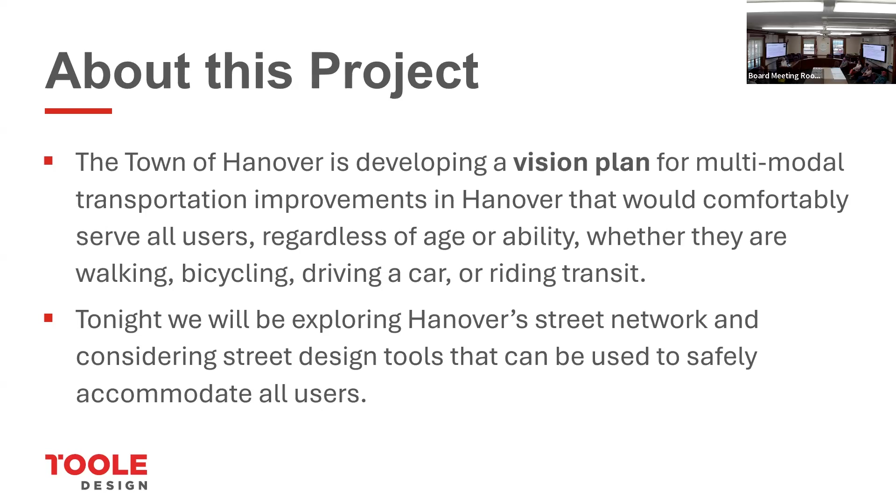And so we're exploring the street network. We're just getting started, getting into what data and background analysis we can get going. But really, it's the collective experience of everybody here that helps us a lot going forward. What we're going to do tonight is go over some of the key considerations that we're thinking about. Look at some precedent areas and how they've changed, both internationally and maybe nationally. I don't know if we have a US example, but we also have a toolbox, we have maps. And so we want to talk with everybody about your thoughts about the area.

Carolyn, can you walk through what you've done today? So we are on an intensive, we call it a charrette in our business, where we're 3 days working very closely together. We're in the Murray room of the library and you're certainly welcome to drop in and see us. Dick is with us for 3 days from Holland. So we're doing a real intensive, and we're going to get the ideas out and then refine as we go along, and then have a presentation back to the town in the fall on where we are for input. So we're in the Murray room.

This morning we met with town staff and college planning staff so that we understand some of the thinking right now, and what you're hearing, and additional plans. A lot going on, lots of construction, and with that go transportation improvements. Then there was some field reconnaissance in the afternoon. And then we just met with the bike walk committee and got a lot of input from people, some of whom are still here, who have been thinking about these areas for a long time and have a lot of history. So we have a whole long list. East Wheelock Street definitely needs to be redone.

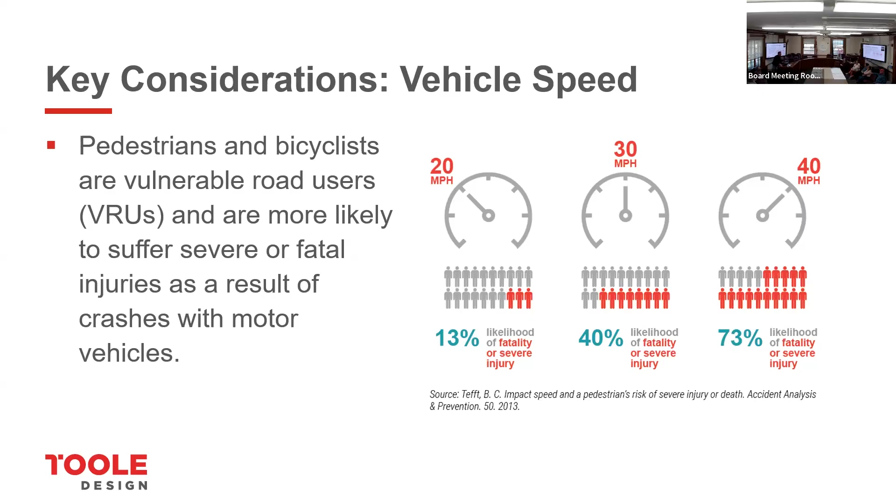I know that Hanover has this 25 mile per hour limit townwide. At the same time, we also know that lowering it even further, you're running into trouble. But design speeds and legal speeds are two different things. So we might even think about designing it for lower speeds at certain areas where we feel that need to be.

And the second key consideration is that there's not just one type of bicycle user. There are a zillion types of pedestrians, we know that. But for bikes, we got stuck in this one thing where a bike lane is for people who dress up with helmets and sporting gear, and they go as fast as they can, and they're shouting to everyone who's in their way.

But that's only about 4 to 7% of people who actually want to ride a bike. And if you design for that, you got your lovely bike lanes on Lebanon and on Wheelock, which are terrible, and I would never ride with my children, mainly because I'm not part of those 4 to 7%.

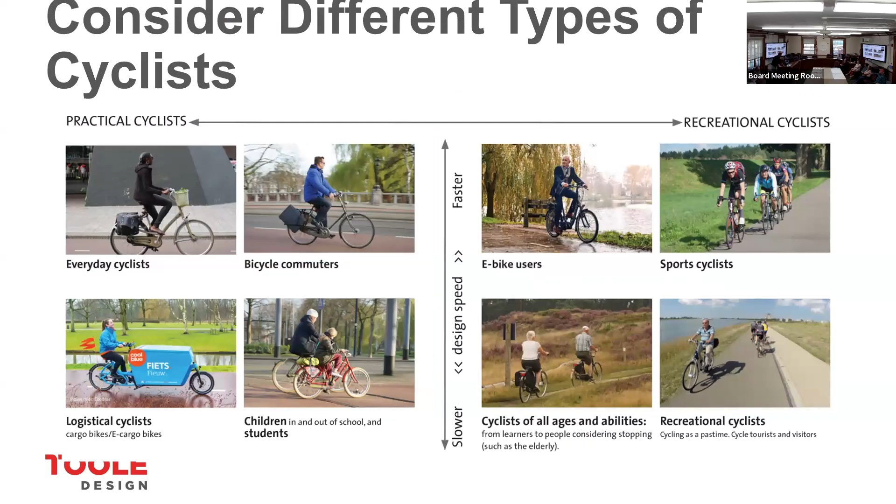I'm part of the 51 to 56% who wants to enjoy safer ways of traveling, right? We're not all sporty cyclists. We're not all that male daring one. People have different needs, so identify and design for that, because that's really the inclusive way of doing it. And that means we need different types of infrastructure, more than just a bike lane.

We need maybe an advisory bike lane on certain lanes, but certainly when we go to streets which have higher speeds, higher than 25 at least, or busier streets, more than about 4,000 to 5,000 cars per day, you might need to think about separation, which is more than just paint. And if you don't, you just keep ending up with all of those little accidents here and there, and you're never going to be proactively getting a safe system.

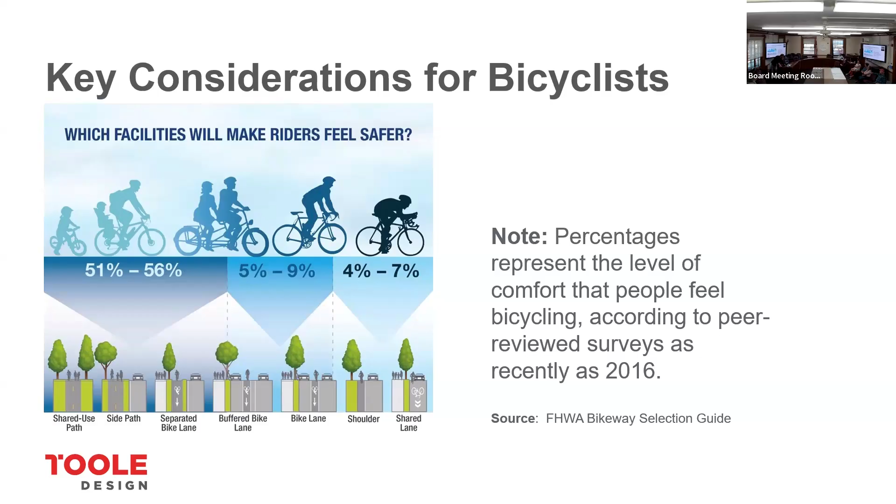Figuring out where we need that infrastructure: we've got our guidelines, I've got my Dutch guidelines, and FHWA, your national system, came up with these schemes which more or less overlap that, so that's pretty nice. I think they're still a little bit too daring, because if you look at this scheme, you see that at 30 miles per hour with 6,000 cars, you can still get away with a bike lane. I wouldn't do that, so that light blue area, I would shrink it.

A bike lane is a lane on the road right next to traffic. Yeah, a painted bike lane. And then a shared lane is just mixed use, you get all sorts of forms, I'm going to explain it later. And a separated one is with a curb or a boulevard or something which brings you further away from fast driving cars, basically.

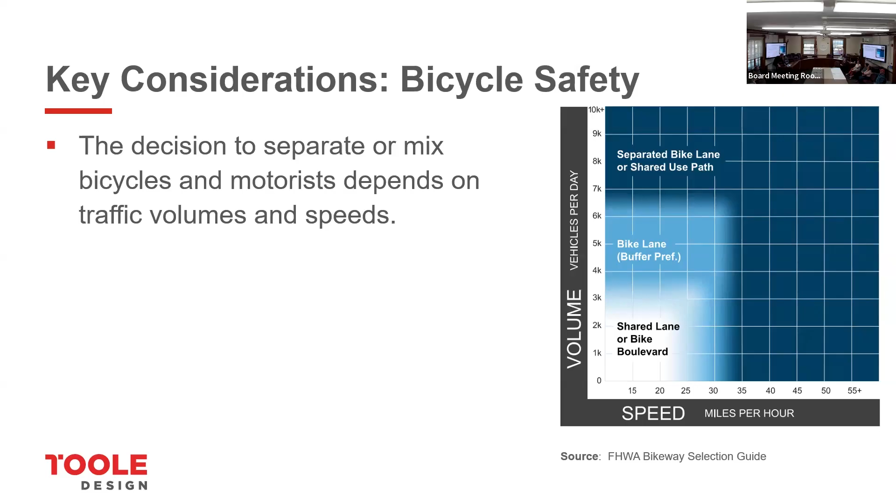Using guidance on volumes and speed provides us input on where we need to provide that separation and where we can do the mixing. And they are two sides of the same coin. You really need that. There are two different worlds. The world of traffic, moving from A to B as fast as you can for drivers and being annoyed when you're in traffic, and the world of people where there's crisscross movements and you interact with each other, you're social, you're riding two abreast or walking two abreast on the sidewalk, people drive courteously.

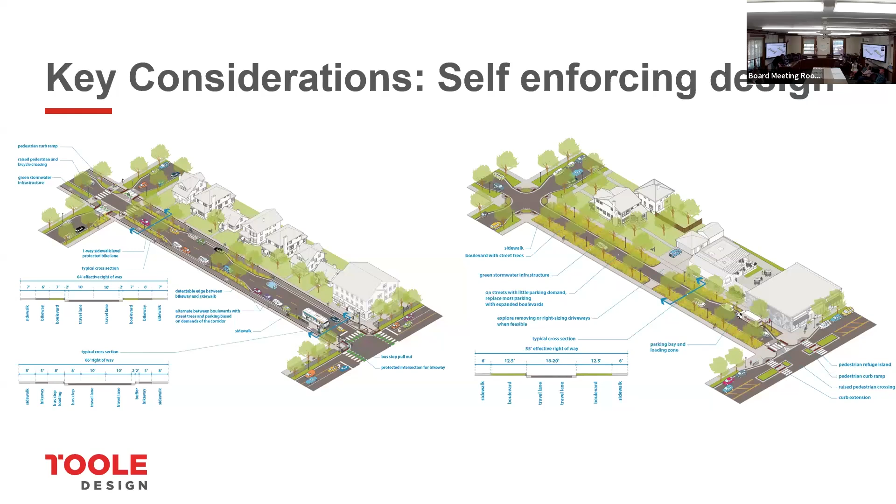So it might make sense to at least put those as high priority routes we need to tackle one way or another, infrastructure-wise. And at the same time, there's also a whole network of other streets which is already there, where we live, where we do our stuff, where we work maybe, and we call those the local streets or the quiet streets.

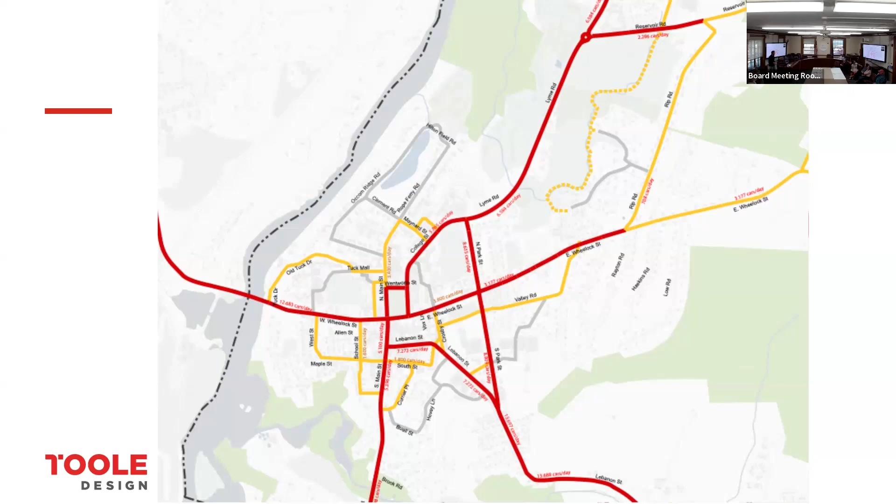They're just there, and we don't need to do a lot with those. We might need to tweak them here and there. We might need to take some additional crossings or some safety points, but you don't have to completely retrofit from A to B. And that's the gold we have in our hands. And I think we need to exploit that in some way to see if we can capitalize on that.

So say, how are we going to provide safe walking and cycling options along the corridors where we need to? We're going to separate where we need to, and then we can make use of mixing and mingling where we can. And that second network, that quiet street network, if you can make that more continuous, then it's already there. We don't have to wait 10, 15 years for the whole capital project thing with shared use paths and protected cycle tracks and wide sidewalks to finally be built. It might be even longer.

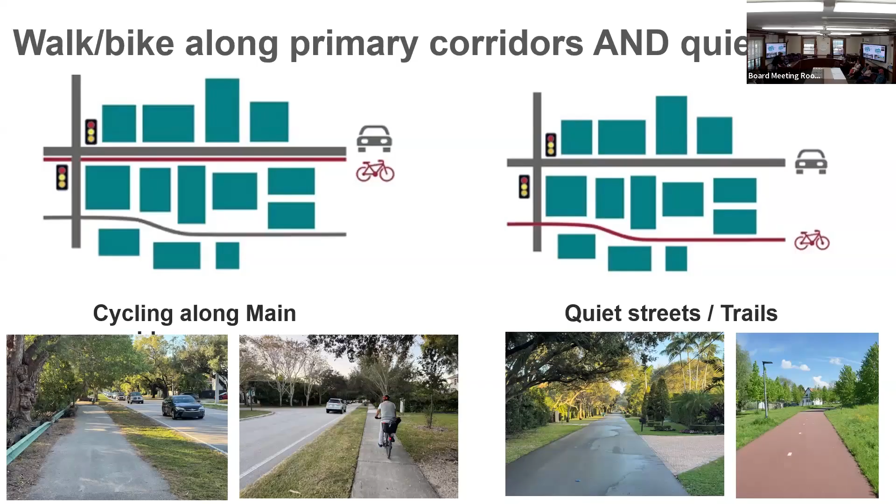So those two sides of the coin again, we're trying to find that within the downtown and also further out. And with that in mind, I don't want to be talking too long. I got 4 examples from the whole world just to inspire you a little bit how other cities, other places are achieving or trying to achieve that. Bigger corridors to lower corridors, starting with where I'm from, Rotterdam, in Holland.

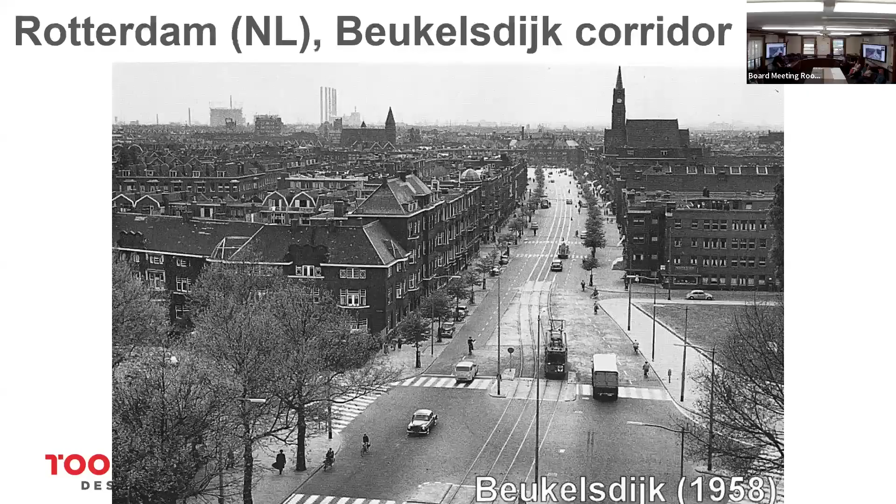And take you through time, old situation. Well, we had the same situation as you guys. No infrastructure and people driving and cycling, doing everything in the lanes, even the streetcar. This was the same street about 15 years ago. So we got our protected intersection. We got our separated bicycle infrastructure. We make it red, you make it green. The color doesn't really matter.

There's a wide sidewalk next to it. Cars have traffic lights. There's a crosswalk. There's a cross ride. Every engineer's wet dream is here. It's completely as it should be. But people still die because traffic lights are not the safest way of designing stuff. They're convenient because you can enhance your traffic flow, but you accept a little bit lower traffic safety and red light running and severe incidents.

So it was taken out again, and this is the same situation nowadays with a roundabout, and it's a crosswalk, cross ride. It has right of way for walking and cycling. There's even a bus stop near the roundabout, a floating bus stop. Cars go through it faster than when it was still a traffic light, because they don't have to wait for red light. You can go gradually and slowly, which makes you get through the corridor faster.

So all these little design tweaks, there's the refuge island, center island, bigger island, to get across every side arm of the roundabout. And all of these little tweaks together make this a safer corridor to travel through and faster for cars and faster for bikes and pedestrians. So a gradual walk through time. Another one is the same thing from the top.

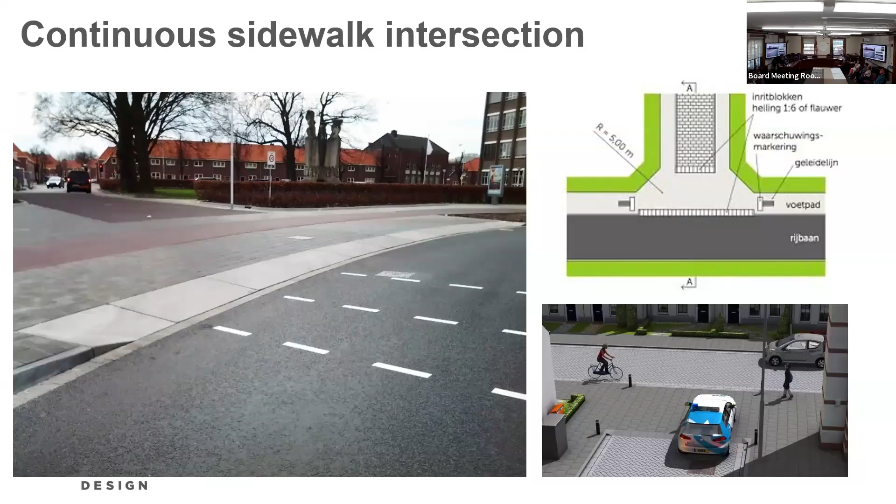And if you're going into Allen by driving or cycling, you have to yield for all of the pedestrians walking the sidewalk. Yeah, so it works, and it is super intuitive. You probably wouldn't even notice it, but it works like a charm. Currently, that design has been figured out how to fit into the American guidelines, so that's nice. This is still Canadian, and Nanaimo's figured that out for Canada.

But it really works in the way that it's so intuitive that if you're getting onto the main street or off the main street, you do that at a slow pace, and you're really alerted to all of the traffic modes, walking, cycling, and car traffic who you have to give way to. So all of those clues together work better than just putting a red light and a green light up, or better than a mandatory stop and then sort it out.

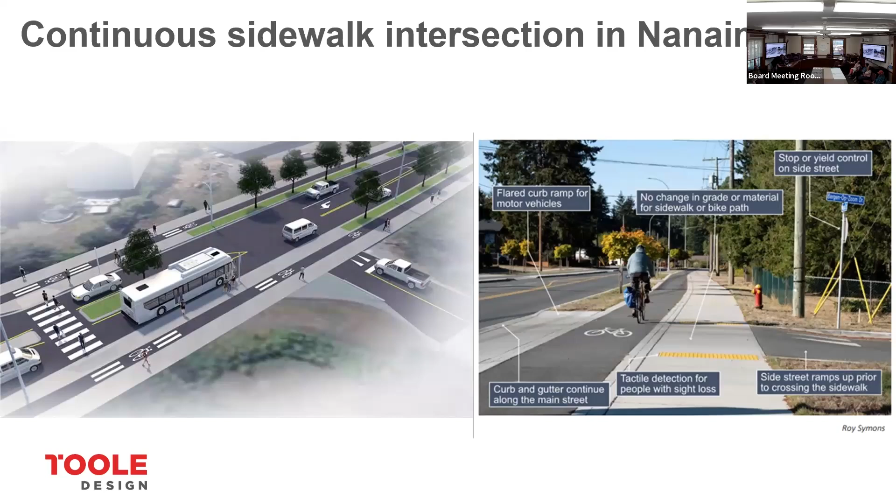And that's what I mean with proactive design. And you can put that street hierarchy of this is a main street and that's a side street. You can make it way more apparent than everything in the same black asphalt. Another one of those examples somewhere else in Canada, Snow Country, Snow Town, pretty similar to this one, where this is one of those side street entrances nowadays.

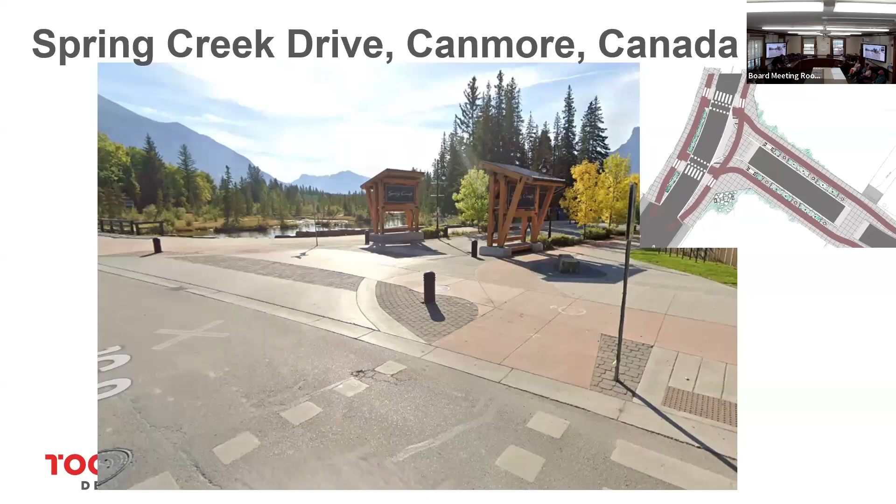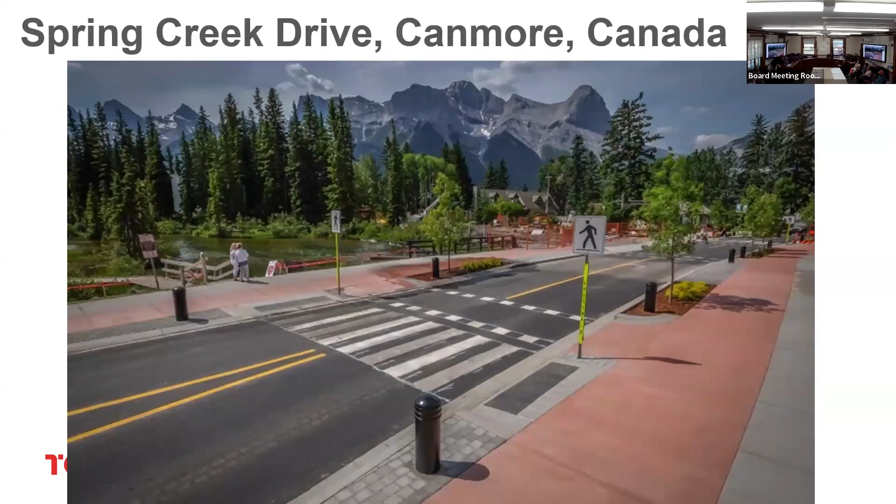Old situation, new situation. And you also see a crosswalk and a cross ride next to each other. And they use red again. They're a little bit petrol, might be green. But designs like this can really help and finish your street network. Same situation altogether. So there's, I think, 8 months of snow on this one, but it still works. Even the context sensitive materials with pavers or stamped concrete. Situation.

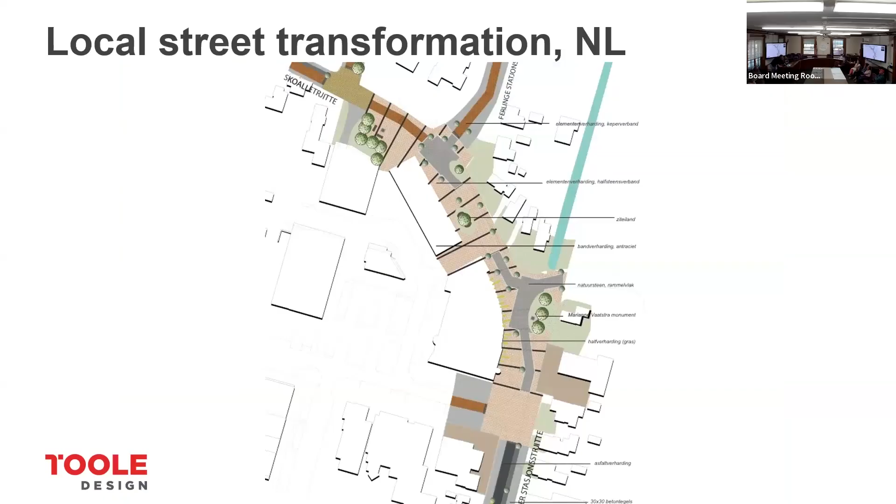And finally, one example from where I live, a small town of, I think, 10,000 people. This is their main, well, the main street basically runs around their shopping area. And people were doing that with about 30, 35 miles per hour through this corner. And I just took it all out, and in terms of placemaking, figured it was more of a place than a road. Put a spaghetti of little brick pavers in, and they designed. People still drive the same amount of cars right there, but people behave differently if you change the context material.

If you take away the curbs and take away the asphalt and take away the signs and the lines, they suddenly start to behave like people again. That's pretty funny. So they slowed down. They started to look left and right where there's other opposing people passing over, etc. And yeah, it kind of works.

And I'm not saying you should do this everywhere, but at some locations you might think about humanizing streets more instead of doing it 100% the engineering way, because it will create your public space. It will enhance your public space. It will increase your traffic safety at some locations. There's a little bit of inspiration of how we use different tools on higher order streets and lower order streets. There's way more tools, and then giving that part to you, or how to tweak your streets over here.

Everybody see me? I'm gonna try and get out of the way.

So all of those street designs that Dick went through are sort of a combination of ingredients that are in a recipe that is different for every location. And we have those ingredients available to us to kind of cook up our own recipe for how we want to make our streets safer for all people. A lot of the presentation focused on bicycles because that's sort of most challenging, but the pedestrian is the basic building block.

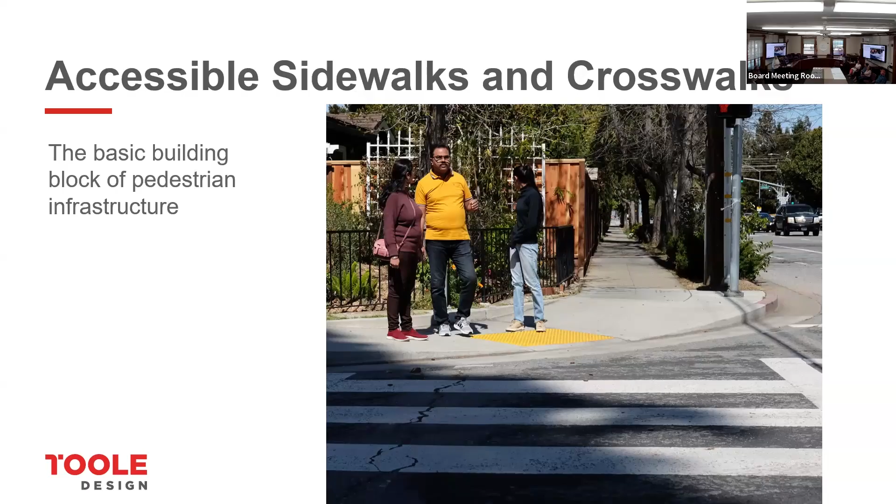Where we can, we want a landscape buffer. People want to be separated from the traffic next to them, particularly on those primary roads we showed in red, which tend to have higher speeds and higher traffic volumes, and we don't always have the right of way. Hanover is blessed with a lot of nice tree buffers with big trees, and it makes walking much more pleasant. The trees also help calm traffic because they make the space feel narrower.

Then we look at shared use paths—this is the Lyme Road shared use path. It's very comfortable for all types of users; these happen to be roller skiers. It's a place where I see kids learning how to ride their bike, a place that works on a really busy road. It just needs to be longer and needs to get through the intersection better—we heard a lot about that from the Walk Bike Committee.

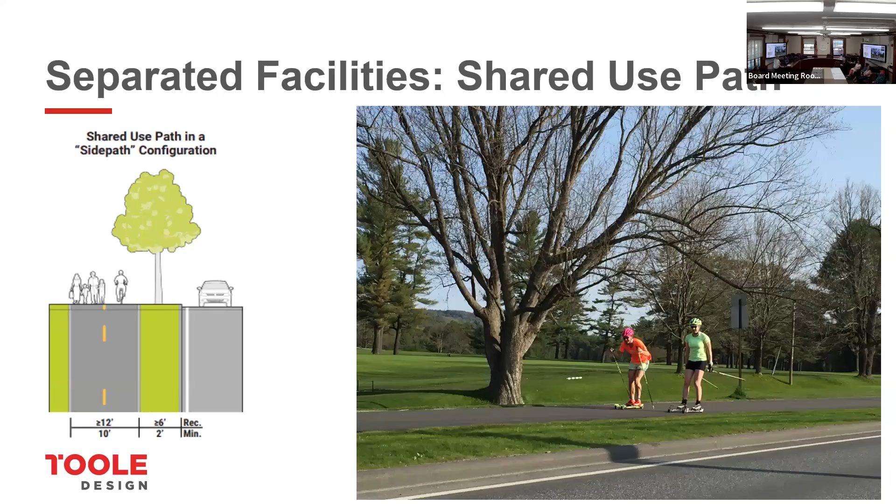When you look around town at areas with bike lanes, like on Lebanon Street, the traffic volumes are just too high for a simple stripe lane, so you'll see people using the sidewalk instead. They're telling you what they want to do, and it's logical—what makes sense for all ages and abilities.

There are also buffered bike lanes—another option in some locations, if there's space, though it takes right of way. Honestly, a lot of times when comparing the right-of-way cost of buffered bike lanes versus an off-street side path, it's less right of way to do a side path, but sometimes bicyclists work better in the street. So it's another tool in the toolbox that might be applicable for a particular type of street.

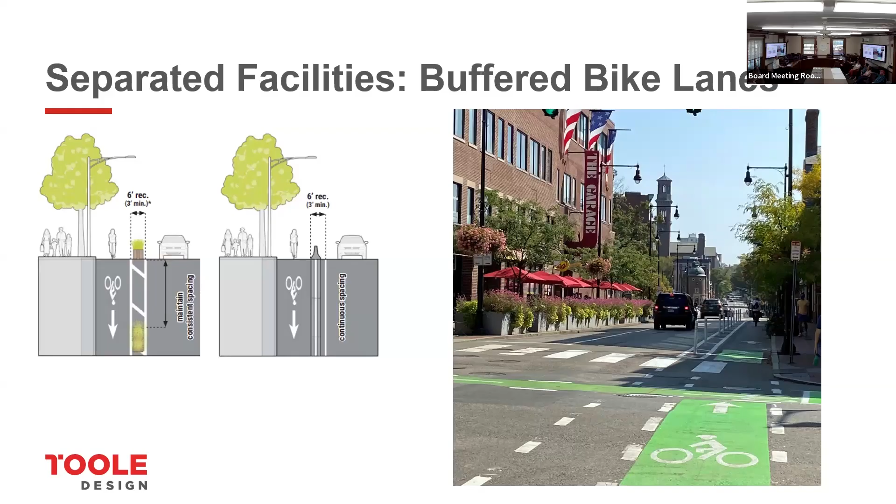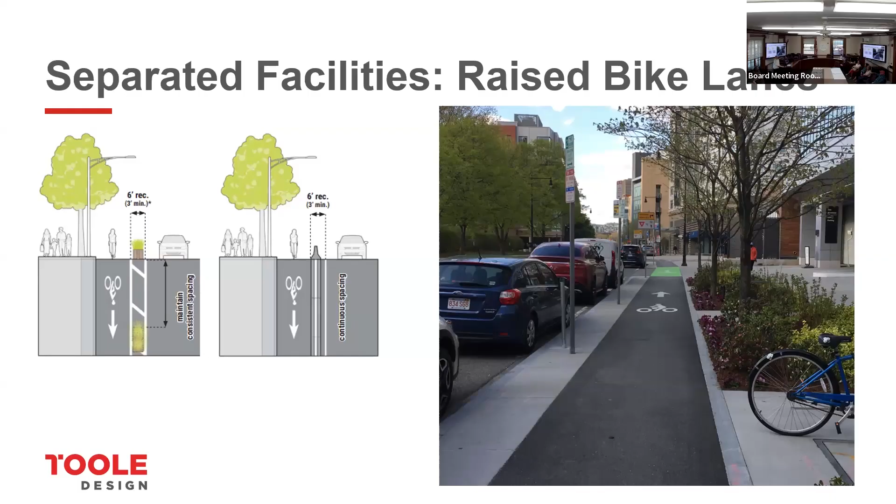Sometimes there's a raised bike lane at the sidewalk level, which also feels very safe and is separated from pedestrians. In this location, there's a little green strip between the pedestrians and the bikes, which helps it feel safer and better if you have the right of way—it's a good way to go, though we often don't have that right of way. The vegetation in these areas can also absorb stormwater and provide additional green benefit, so we definitely want to look for those opportunities when we can.

Then there's intersections—as Dick said, this is where we're failing, because this is where crashes happen, this is where it's dangerous. We have to bring safe biking and walking facilities to the cross streets better and make it safe for everyone.

Then we look at shared streets. So we sort of looked at the tools for those red roads that we saw on the map that have higher traffic volumes and speeds, but then the slower streets may need some additional tools in order to make the traffic truly be slow enough so it's comfortable for both bikes and pedestrians to be on the street.

So what is a shared street? These are low volume streets designed for low speeds to allow pedestrians, cyclists, and vehicles to mix without that traditional separation.

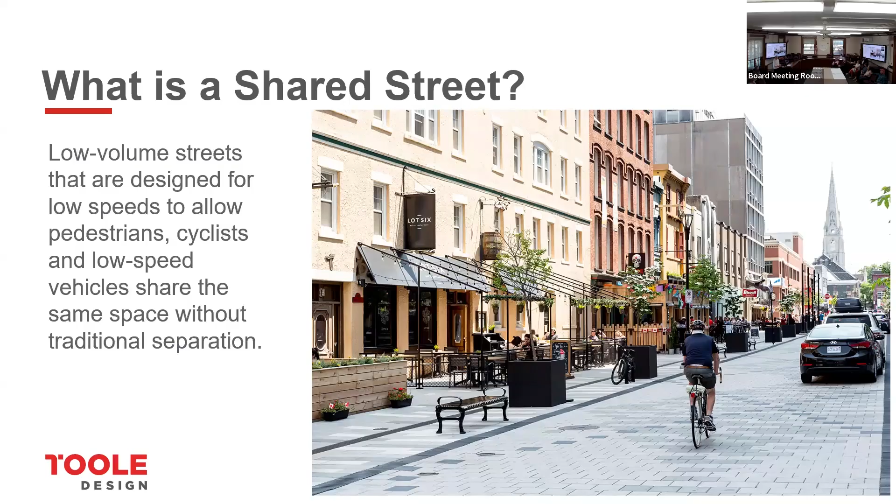Here's a shared commercial street that actually Dick designed. Maybe you want to say a few words about this, but I'll just say it's in Banff where there's a lot of snow. Yeah, it's in the Canadian Rockies, and it's very touristic.

Everyone's outdoorsy here. This one is sold as a woonerf, and a woonerf is something we in Holland designed in the 70s, and I lived in one for 10 years. My kids were born in one. The main idea is that the outdoor space is really part of your living room.

As people would be invited in your own living room, they would behave, they would not run around. You don't want people to rush through your outdoor living room. And it's your collective living room, so you share that with your neighbors and your shop owners forever in this situation. So physically make it impossible to speed.

That's the main idea. Sometimes we say social interaction or enforcement will help people reduce speeds, but you can also use physical elements, and that can be everything from a tree to a light post to a bike corral to a patio, arranged in such a way that it's really hard to speed up.

If you have a wide, smooth lane, people will speed. If it's a runway, they will speed up to the point where they will take off. But if you make it narrow, winding, and going up and down horizontally, but also vertically, then they will slow down. And then suddenly other functions can happen again.

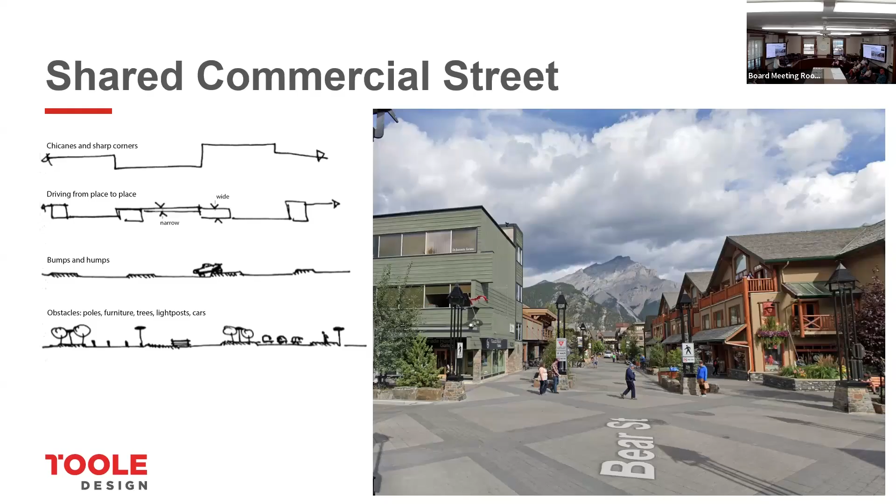Could you spell that for us? We have students in the audience, I would know. A woonerf - W-O-O-N-E-R-F, which is a Dutch word which means living room or living yard.

Thank you. So some other tools that are possible on some of the smaller streets that we saw again, to make mixing more safe and comfortable, are what might be called a bike boulevard. In the photo on the right, you're seeing the sidewalks are separated, but the traffic is calmed through - it could be a mini roundabout, it could be a raised crossing. So that all makes it slower and more comfortable for everybody to be using that space.

And people get used to driving slower, and then you see more people using the street more comfortably.

Another tool to mention is the diverter as well - it's on the far right of the diagram. Sometimes we stop it from being a through street. That's a bit easier if you have a grid, you have more redundancy and opportunity for that. I don't know if you've thought of it anywhere in Hanover, but I know in San Francisco they've done that really well. But all of that kind of makes a calm, slow, low volume street that's safer for everybody.

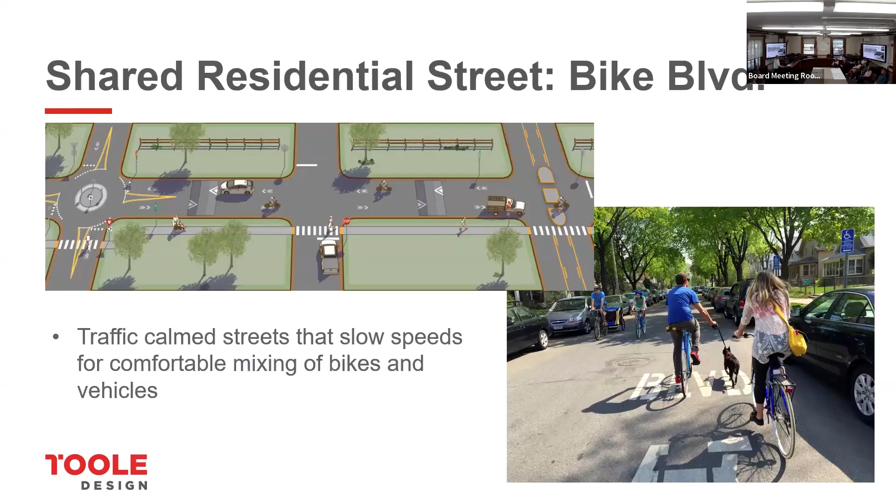Another example is here in Hanover, the advisory lane. On a really low volume street, this is a pretty simple solution that we piloted and was quite a sensation. It shows up in a lot of design manuals. This is on Valley Road, near the ice arena, just south of East Wheelock.

This is a tool from the Netherlands toolbox where you have low volumes of vehicles, fairly low speed streets as well. You're letting the cars share the center lane when they're going by bikes and pedestrians who are on the side, so the dash lines designate where the bikes and pedestrians are. If there's two cars coming, they can go over and pass each other, but otherwise they stay to the center of the road. For a low volume street, you're using that pavement more efficiently than pushing everybody into separate space—using the center because of the traffic volumes, and keeping the sides clear for bikes and pedestrians.

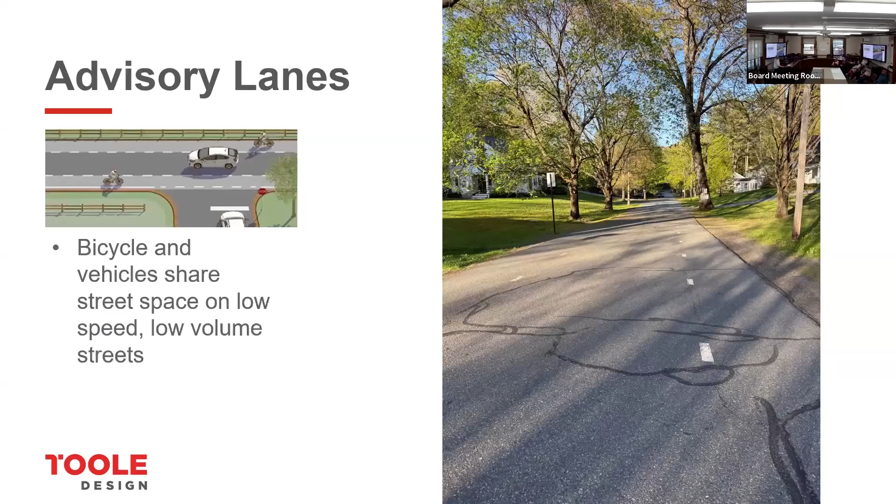We saw an increase of activity by people riding bikes and walking along the road. It was interesting today how many people mentioned it when we were talking. This is a good tool for a small town rural context, certainly, and it has been implemented in more urban areas as well.

So then, how do you make those shared streets slower? There are vertical and horizontal shifts to slow down the traffic and also make it more convenient for pedestrians and cyclists.

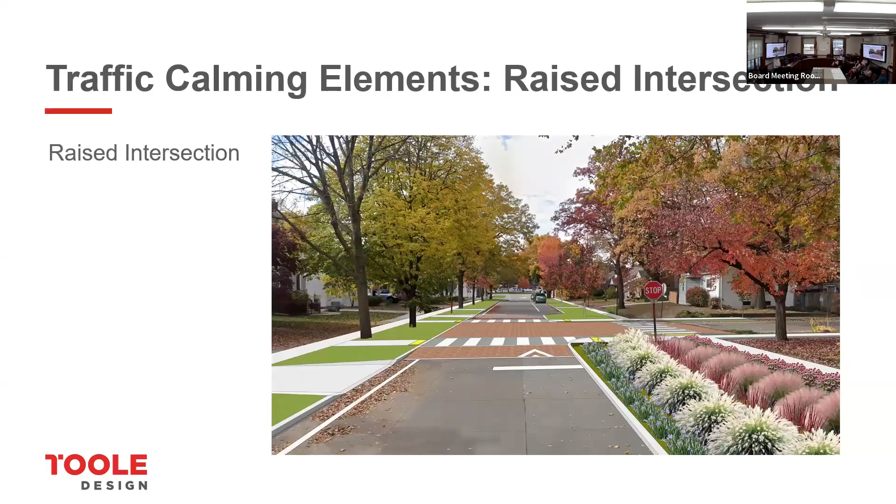This is an intersection that is raised, so the whole intersection is the same height as the sidewalk. You're kind of undulating as you're driving along the street, and that helps to slow people down. There's space for stormwater to be picked up off the street, separation for pedestrians still, but a narrow street with a traffic calming element. This one is both raised and has a change of texture and materials over the intersection itself, which all helps to slow the traffic.

Another example, similar to a raised intersection, is a raised crossing. This is a really good way, especially in a mid-block location like this, to slow the traffic. The way they're designed, they're gentle—enough to slow the cars, but not like the speed bumps in shopping center parking lots that make you bite your tongue when you go over them. What they find with those is that people, as soon as they go over them, really speed up.

There's a lot of what we call speed humps here. They can be raised crossings or standalone raised humps. It's more effective if they're frequent, so you don't get that go-over-and-speed-up effect. We're doing a lot of this in Boston—they've found that spacing of 250 feet in a series keeps people's speeds down. So that's another consideration.

We have this one too, across College Street right at the green, right by Dartmouth Hall—there's a new raised crossing. And on Rip Road, for speed—it's not a crosswalk, but it's a speed table.

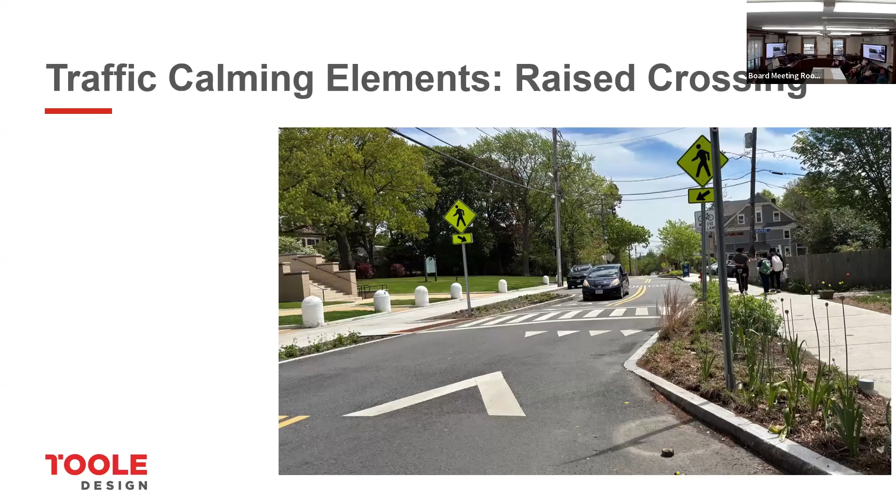In this particular location, here in Hanover, curb extensions also do a lot for calming traffic, and also for giving more space for pedestrians, because they pinch down the size of the roadway.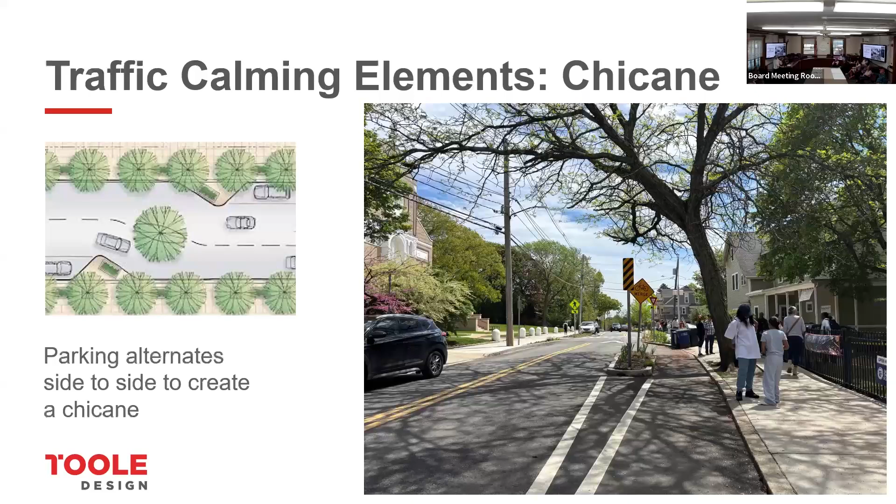And this is a street that's pretty straight, and was a problem from a speeding point of view. And now there's a protected bike lane and slower traffic. And it's a pretty narrow street. This is 30 feet curb to curb, which is pretty narrow.

And then sometimes you have neighborhood traffic calming circles. So this can be at an intersection where a couple of streets come together. This is not a roundabout. This is just much smaller than a roundabout, but it allows the cars to go around and not straight through.

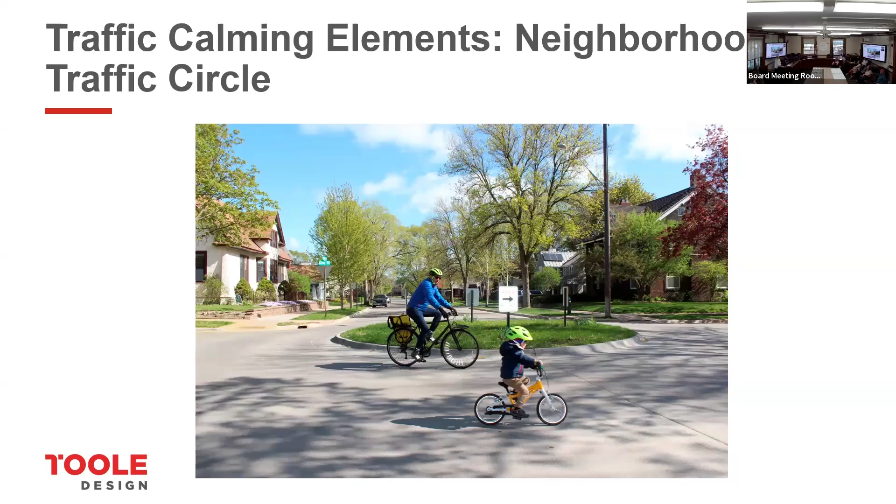Again, another sort of way to calm cars as they're going down a street that you want to have lower speeds on, and even to a certain extent, volume. It probably discourages cut-through traffic if you have to slow down a lot. So those are our tools, and those are things we've looked at and we thought are applicable in Hanover.

And so what we would like to get from everybody here tonight is your thoughts about what ideas you like the most. So we have boards here with the street design tools, and we'd love to have sticky notes on things that you think really would work well. And then we also have maps to identify what you consider to be problem spots.

We also have an online survey, so you can scan the QR code. Hopefully, I don't know, is this blocking it? It works. It works. Yeah.

So there's an online survey, and this is asking people to tell us about what you experience walking and biking and taking transit in Hanover. What could be improved? What are your top 3 problem spots that we can address? We're sort of crowdsourcing what people feel strongly about that we should address.

And yes, questions. I just wanted to get a sense, it seems like you're kind of zoomed in to really caring about the downtown Hanover section. Is that your main focus? Are you open to thinking about other places like Hanover Center? I just want to understand how broad your thinking is.

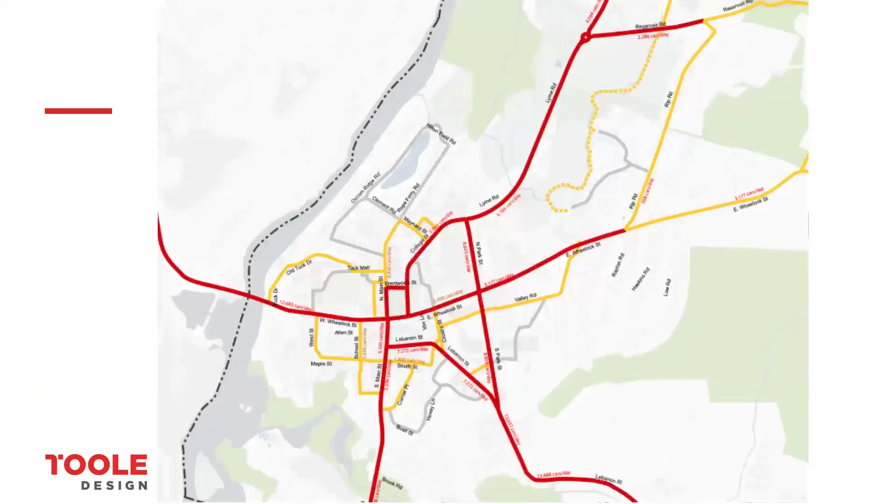Yeah, so I think the Etna Village is sort of in our scope area. Okay, good to know. Basically the 2 villages. Okay. The Etna Village seems like an area that could definitely use gateway traffic calming. So I think I saw Bill before I saw Doug, but Bill, then Doug, and then in the back.

So, three quick points. First of all, vote tomorrow. Number two is, Hanover's way ahead, as Rob Houseman has told us, in terms of planning for multimodal transportation, bicycle, pedestrians, than virtually any place else in the state. We really are doing a good job. It doesn't say a lot, though. I mean, the state isn't very progressive. I know, it's a low bar, but we're doing great.

And the third is, having been on the bike pedestrian committee for 23 years, Etna is always on the agenda, but we don't have anybody from Etna right now coming to the meeting. Barbara, we've had several people. So if anybody's interested in being on the bike walk committee, you're welcome. Thank you. One thing I'll say that is a challenge about Etna is that the road is owned by the DOT. And so that does make everything quite a bit more challenging in terms of what we can do.

It's owned by the DOT. It's a state road, not a town road. So, as you know, is Greensboro Road? I know. Greensboro, yeah. But I mean, Main Street is as well, right? Yeah, but it's in what's called the urban compact. So the town has an agreement with the state on Route 10 and Route 120, where it's in the urban compact, that the town can make changes. Okay. But so that means that agreements can be made with the state. Agreements can be, yeah.

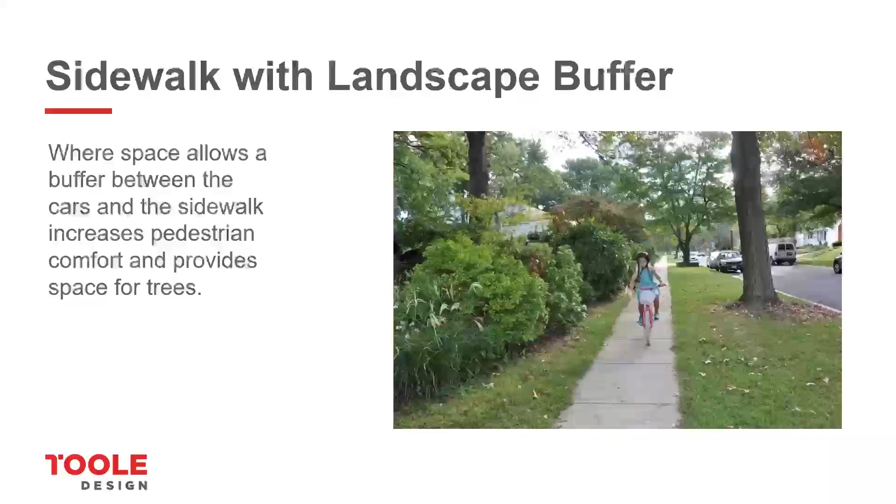Okay, Doug. Yeah, is there a good map within the urban compact of the town rights of way? And could you explain what a right of way means? Like what rights does the town have, say on somebody's front lawn, because it's within the right of way? So the town owns it, yeah. So is there a good map?

So we use the GIS base map. It's fine for high level planning, but it's not good for design. That would have to be surveyed if you were going to do a more detailed design, but you can get a sense of what the right of way is on the town's GIS base map. So that's what we use. The right of way is the town's land, so they can use it for circulation.

It gets really complicated because rights of way can be rights of way by prescription, meaning we don't actually own in fee the right of way; we have the right to use it for public purposes. Those are old rights of way, the right to pass and repass and maintain. So most of the old roads are rights of way by prescription, and then we have rights of way by fee, which is ownership in fee simple or a deed, property line to property line, we own that strip. Those are relatively new.